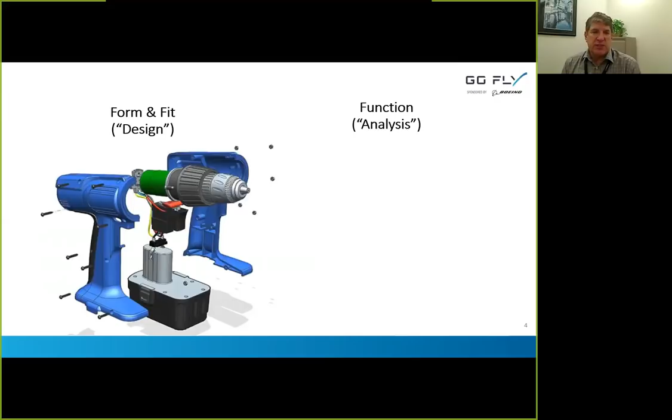So I cleave the world, as an oversimplification, as a conceptual designer, into form, fit, and function. Form and fit is design. And design is: what do the parts look like and how do they fit together? Clearances, overlap, interference, fit - it includes materials, it includes geometry and tolerances. And then function, which is: how does it perform? Does it do the job? And in the end, the question is, does it comply with the requirements?

Every engineering challenge is this balance: to define, to assess, and then if not compliant for whatever reason, to iterate. I tend to consider myself more in the design world, but the configuration job is primarily form and fit. Fundamentally, you're not done until the analysis has been done, and it's a balance of understanding all the requirements and the means to assess the design against each of those requirements in order to decide whether you're done.

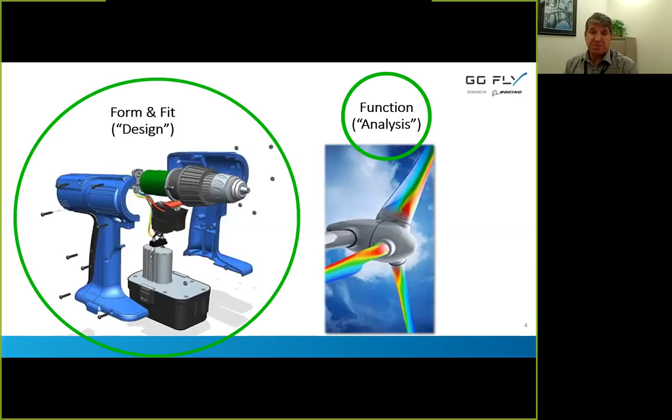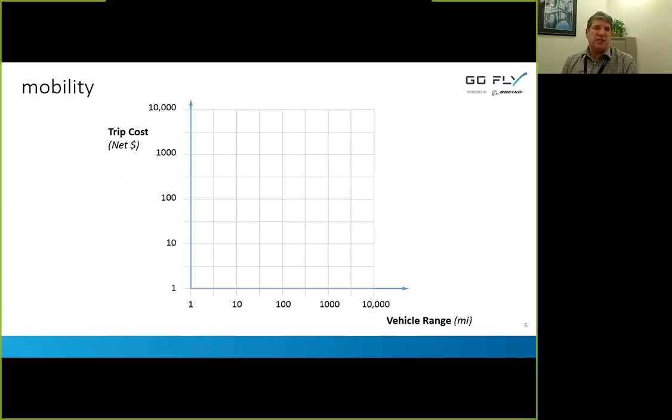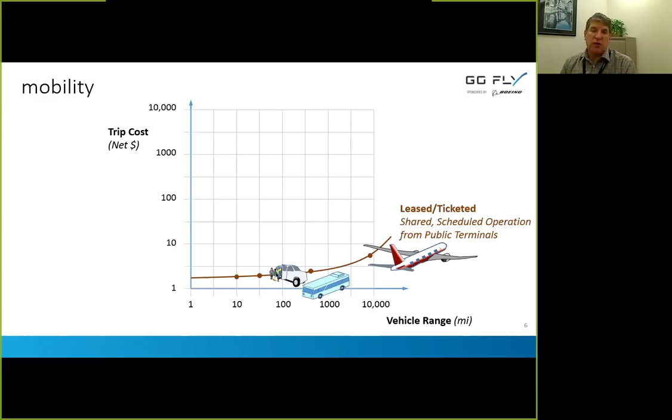So just a quick cartoon. What are we trying to achieve here? Knowing you're done means you need to know the question: what does success mean? So just a cartoon to illustrate, these are different means of cost versus distance of transportation - the van pool, a bus, a commercial airplane - and the cost grows with distance, but when you share that cost with others, it's lower. Or you could do it on your own, have private transportation, and the costs are higher. A private jet is much more expensive than commercial travel.

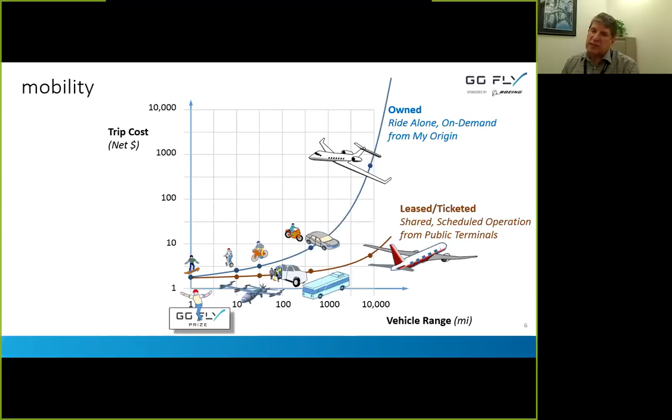Now, what are we trying to do here with GoFly? Uber Elevate is trying to look at joining together people and moving them around in an efficient way over short ranges, a lot of electric aircraft. But GoFly is in here at the low end. We're concerned about speed and we're concerned about range, but fundamentally, it's about the experience - it's about flying, not being flown, not as much about transportation as it is about the experience.

And so here's just my little cartoon - this is what we're trying to achieve. We're trying to, some say, wear this system as opposed to ride in this system. So we want to keep the vision in mind, because the vision is what impacts decisions, especially when those decisions could go either way. The vision of what you're trying to achieve will help you make those decisions. And this is my cartoon of what you're trying to do, the rules, and a cartoon of the fly-off. Keep in mind the objective - every decision gets you closer to that objective, and every decision is influenced by how best to get there on time and on schedule and perform as required.

Just a brief tangent on what is meant by the dominant configuration. In the beginning, there was the penny farthing, or the bone shaker, called a velocipede. Over time, they moved toward what's called the safety bicycle, but we just call it the bicycle. It's the dominant configuration, but it's not the only one. There are exceptions - we still, in some ways, refer to them as bicycles, but they're not exactly the two-wheel dominant configuration. And the same is true in aircraft.

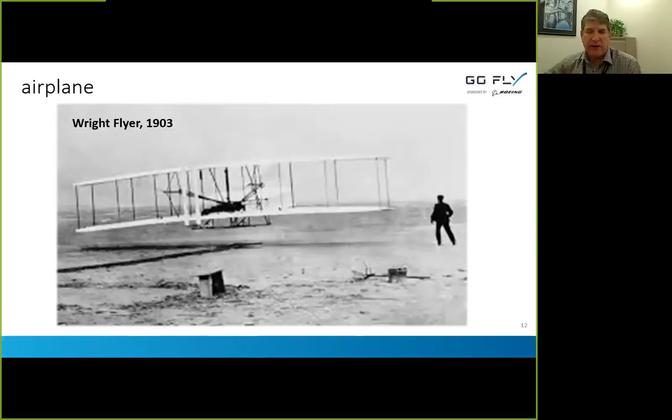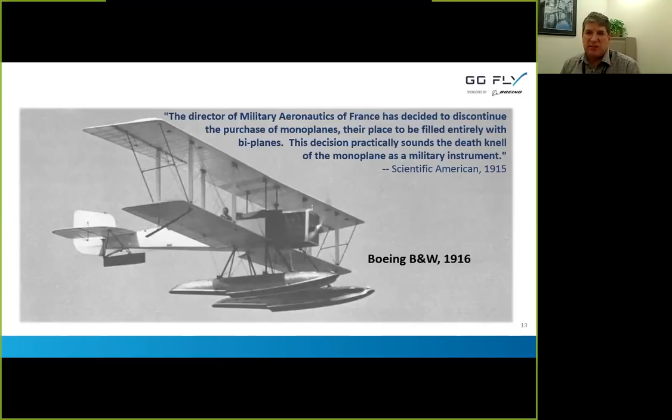We started out with the first successful manned-powered aircraft in 1903, and then we moved on. Boeing, Boeing and Westervelt in 1916, the beginning of our company, with a biplane. What's really interesting is a statement in Scientific American at the time, where they were so sure that was the best you could get to, the dominant configuration. There was a statement that they would entirely fill the sky with biplanes and move away from monoplanes, which of course we know isn't true.

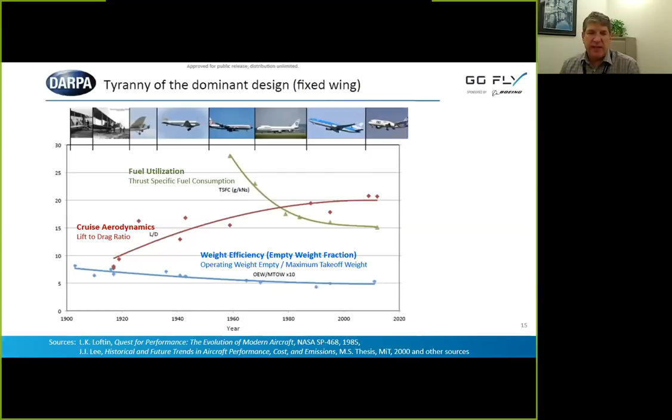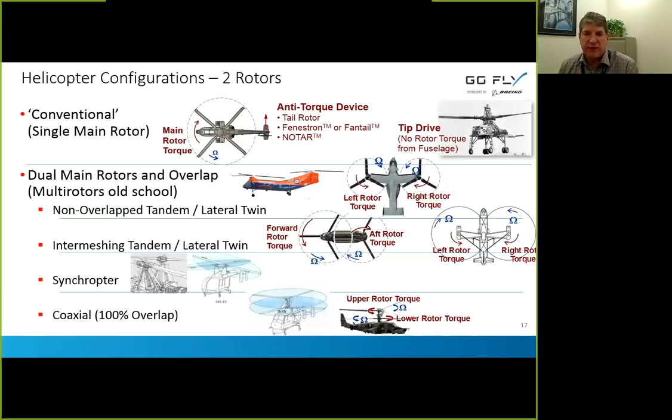Now we go to vertical flight. Early on, the lateral twin aircraft - you'll notice this is aircraft versus airplane, because we're not talking about conventional takeoff and landing. It's a little bit of a busy chart, but over time, helicopter configurations - again the dominant configuration is two rotors, single rotor with a tail rotor, the tandem, the lateral twin, the tilt rotor. Only on the upper right do we have a single rotor helicopter that truly only has one rotor, and that's because there was no need for anti-torque with tip drive. But again, there's a whole series of configurations here in terms of vertical lift aircraft, all with different strengths and weaknesses.

In the end, when people say helicopter, this is what they think of. It's the dominant configuration, and as I said, there are exceptions. They also qualify as helicopters, but they're not what people think of. So that's the meaning of the term dominant configuration.

Again, the metrics tend to level off until you make a dramatic change to the configuration. You get what you get. You need to really come up with a technology breakthrough, perhaps at the subsystem level, if you're really going to see improvements.

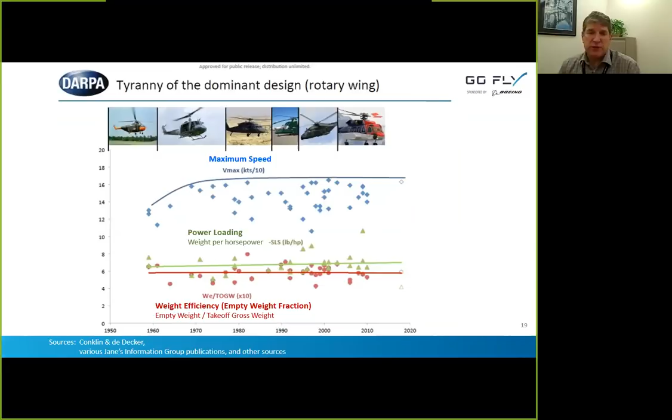We have this small, quiet, urban transportation activity going on, sponsored primarily originally by NASA and Mark Moore, and now Mark Moore at Uber, and the Uber Elevate activity, with an extraordinary number of companies. I haven't shown any pictures here, but there's easily 65 designs currently in the news, and new ones every day, with organizations popping up.

So again, there's a new mission, but to remind you the difference: what they're trying to do with urban air transportation, urban air taxis, on-demand mobility, is get people from A to B — it's more about riders than about the experience of flying. So when you make decisions, keep in mind the difference between what we're trying to achieve with GoFly, what we're seeking you to achieve with GoFly.

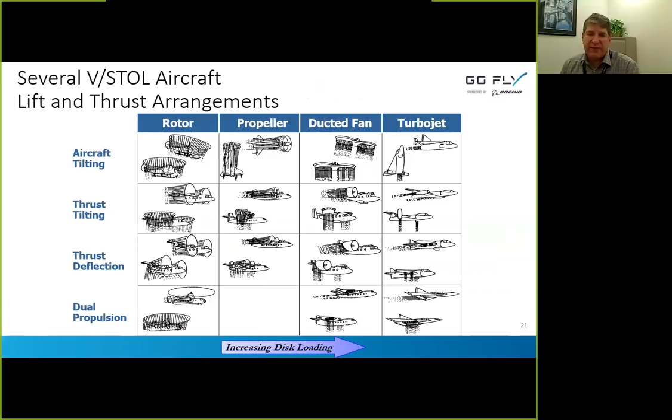An old ancient cartoon, just to illustrate when you start to talk about more than just vertical lift, but going some distance, especially with some speed — there's a whole series of ways to skin this cat: tilting the aircraft, tilting the thrusting system, deflecting the thrust, or having dual propulsion. Many of these have been tried, and there's not a whole lot new under the sun when you think about it.

If you look at the left side, this was in 1959 — look at that, 6 propellers on a wing with tilting. Looks a lot like some of the electric on-demand mobility designs that are coming out. And at the top, Curtiss Wright, very successful with a tilting quad prop, and then some more designs, and there's a tilt wing on the right with 4 props in line.

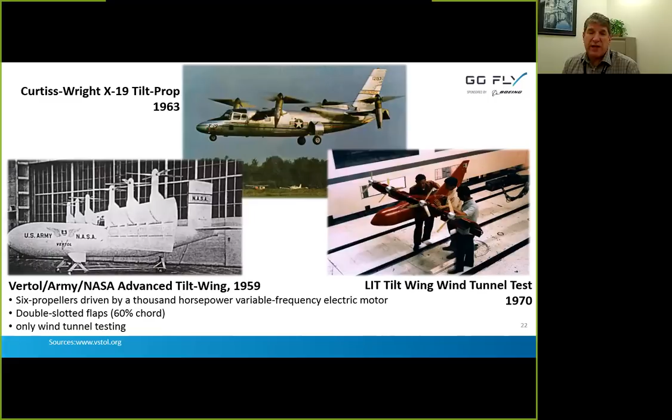Many things tried, many things, they were tried military, a little bit of civilian work going on, but they're challenging because they run into the challenges of meeting all of the requirements.

Many of you may be familiar with this, the original version of the V/STOL Wheel by McDonnell Douglas Aircraft Corporation. It tried to illustrate the many different ways of achieving what's called V/STOL flight, vertical and short takeoff and landing. Now this included concepts that never flew — this was theory and cartoons, and it's been iterated many times.

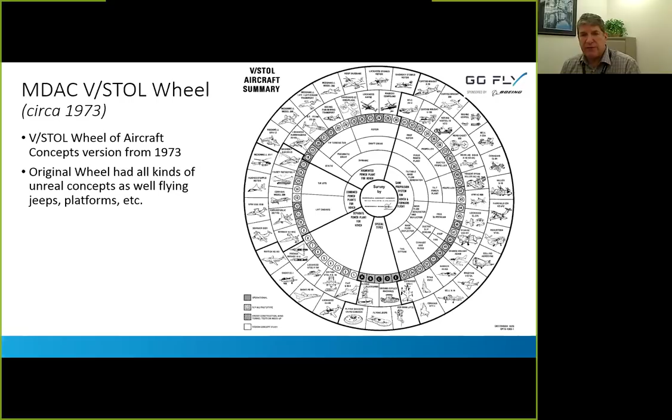I have a collection of the iterations of it, and this is the latest — Mike Hirschberg of the AHS has been the fundamental archivist who has done the latest version. And it illustrates the V/STOL concepts.

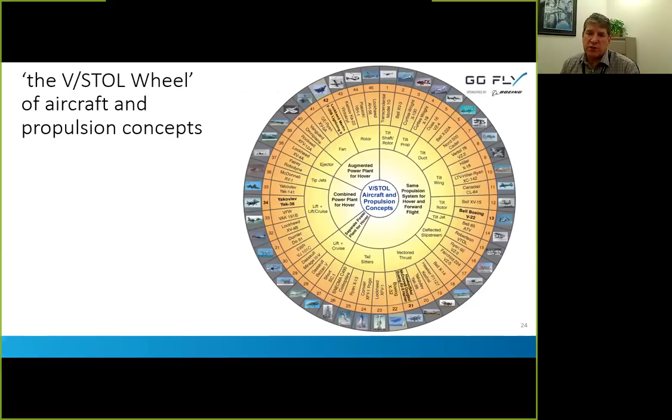Almost every single one of these have flown. Unfortunately, it's called the V/STOL Wheel of Misfortune, because very few of them have actually gotten to fielding. But I don't think it's misfortune. Many and most aircraft crash in flight test and have incidents and mishaps — that's part of the game. And good judgment comes from experience, and experience comes from bad judgment. So it pains me a little bit when this is called the V/STOL Wheel of Misfortune, because it really is a great testament to the amount of engineering that was done to solve some very, very hard problems.

Many of these flew, but they didn't have enough payload or useful load to become a valuable product, but they still flew and illustrated. Now, only 4 of these aircraft, different types, have gotten to any kind of military fielding, and there's one on its way to civil fielding, and that's the Leonardo AW609. Although they just pushed certification back, it's still well on its way to providing civil capability.

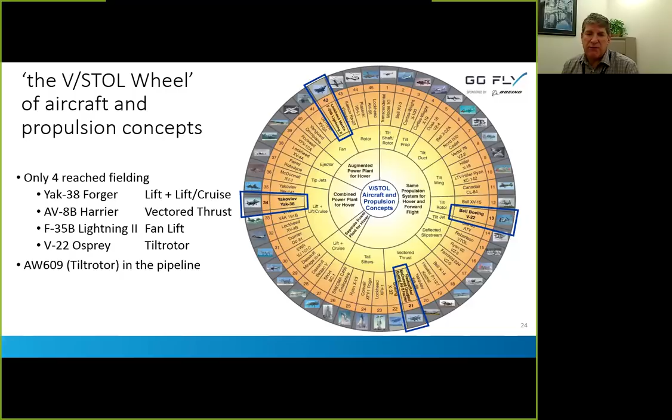So it's an interesting history of many different configurations, and I invite people to take a look at the V/STOL wheel, just to look into all the different ways that people have tried to solve this problem. But what you should understand is that perhaps the most significant, the second is probably useful load capability, because of the costs associated with this challenge.

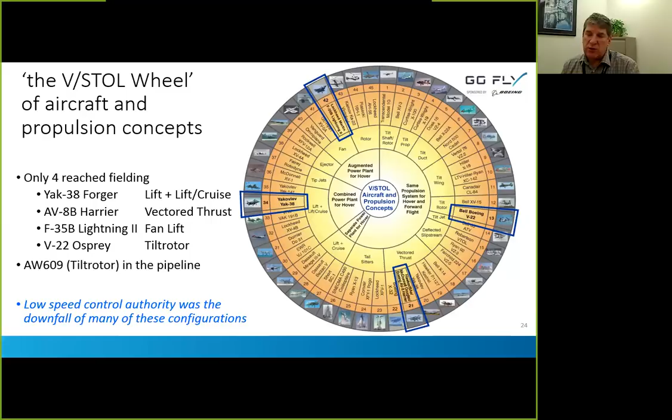The most significant reason these aircraft didn't succeed is that they may have flown well as an airplane in cruise, and they may have hovered well at low speed, but they didn't have the low speed control, and they did not have the control authority in transition from hover and VTOL to cruise and back again. That's actually the hardest part. Making it fly like an airplane and making it hover like a vertical flight aircraft are far easier than getting through transition and conversion. So keep that in mind, and we'll talk more about control authority and balance of the airplane.

Just a quick example of why I really love being a configurator. This is the Comanche. I was fortunate in the early 80s to be on the configuration team.

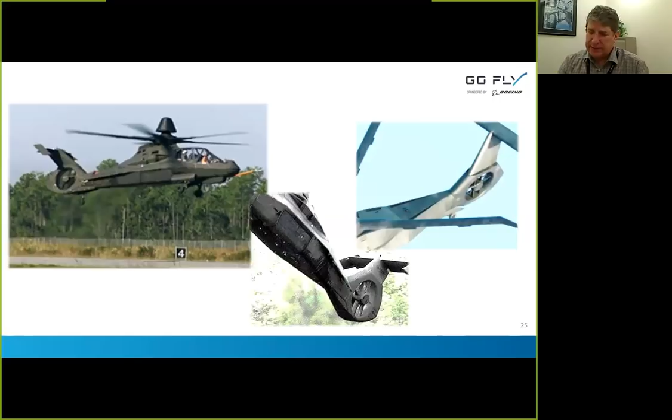We were working on how to get the exhaust not to provide an infrared signature that would allow it to be threatened by shoulder-fired infrared missiles. I'm at the knee of a great configurator, Bill Harper, and he says, 'Hey, how about if we exhaust it in a long, thin strip along the tail boom, and it'll mix really well, and we won't have a plume.' Bob Frawley from Sikorsky, the propulsion lead, says, 'Can we do that?' And Bill's comment was, 'Yeah, I can do anything I want. That's why I love this job.' I remember that like it was yesterday.

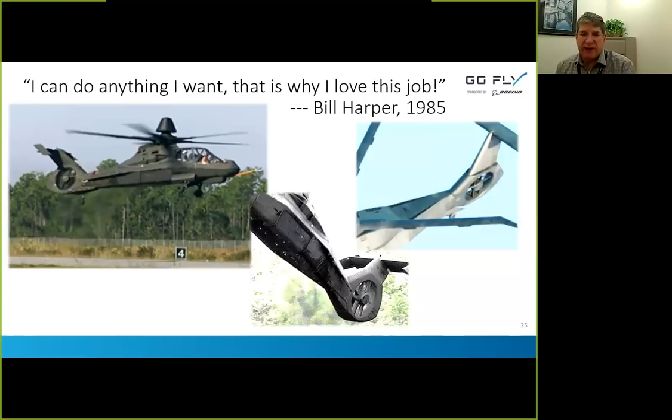The challenge is, it's not just about what you want to do. It's about finding a technically feasible solution that meets the objective. So it's not just cartooning. It is, in fact, innovating and trying to find a way to meet challenging requirements in a new way.

So what are the constraints here? Of course, there's physics. There's perspectives and paradigms that's never been done before. And then there's resources - the funds, the material availability, the tools you have to get the job done, the team of people, and usually most important is time. Because if we had the luxury of time, we could redo it and we could iterate. So time is one of our greatest pressures.

Just a little cartoon - we've got resources, we've got the paradigm. Sometimes we can afford things that other people don't get and they're uncomfortable with. And then there's physics, and there's our design. The conventional design is inside the paradigm and inside the resources and inside the physics. And then we have the unaffordable, and then we have the impossible. Our challenge is to move from the conventional, the dominant configuration, and be creative, but work within our constraints to try and achieve something novel that perhaps people aren't comfortable with, because the paradigms are a challenge, especially among your sponsors and the regulators and all those people who do in fact have to buy in. But that's the challenge of selling your story and making the case for the fact that it can be done and that it better solves the problem in the face of the risks.

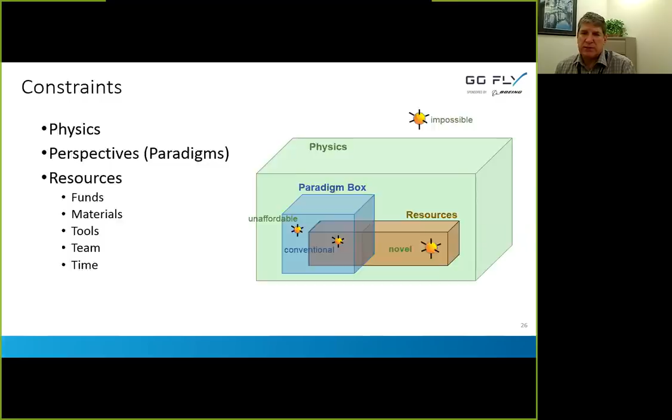So a cartoon here, we've got a lot of ideas, and our challenge here is to think critically to try and understand which ones we're going to spend our time on, and more importantly, how much time we're willing to spend on an innovative idea, either to make it work or to recognize that it's not going to get there and we have to move somewhere else. That's perhaps the biggest challenge - something you're really excited about, but it's not getting there. That's why conversations with others and communicating in teams and diverse teams are so valuable, because we as individuals get really excited about our ideas, and we have to think very critically.

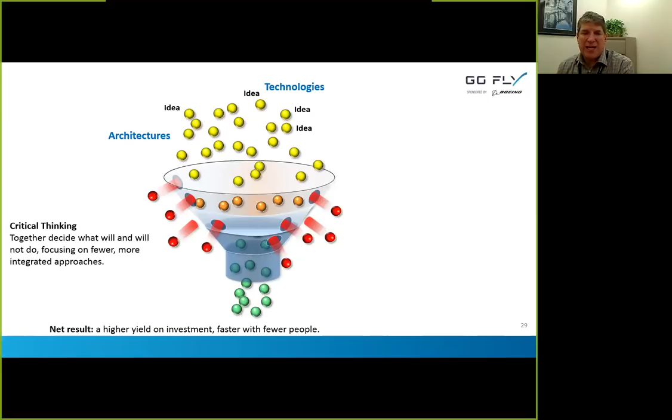And the goal is to filter out the ideas that are just not getting there and end up with a very narrow set. So as you're designing, you may have a whole bunch of creative things, but if you don't have the time to make sure they work, or they don't actually add value based on the amount of costs, how much work they are, you may have to abandon some of your good ideas. And that's the most strategic part of configuration design - deciding what not to work on, what not to change, what is good enough. I'll come back to that.

So here it is. Here's the picture of the aircraft. Everybody loves the picture of the aircraft. I've been on programs where we don't really know what the requirements are, and everybody is screaming for a picture of what the aircraft looks like. And the challenge is, as soon as you do that, you lock yourself in terms of some paradigms. So the later you can put down the solution, the better. As a matter of fact, Gwen has been very clear in this GoFly activity that we shall not have an icon of an aircraft.

We shall not be showing anything that implies an approach to a solution, because that immediately narrows the design space. We really want the real resources, not the paradigms, but the tools and the team and the funds and the schedule and the physics to limit us.

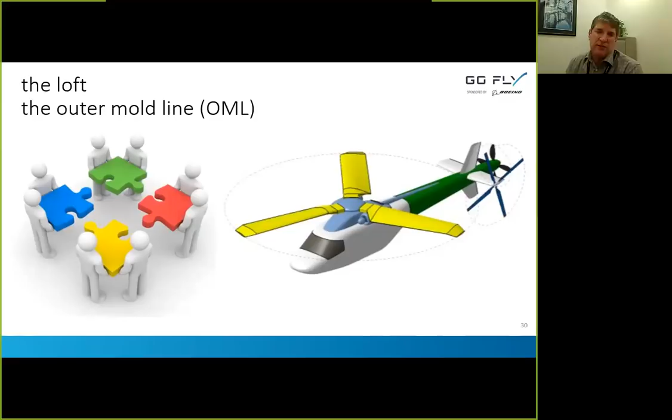And we don't want to be stuck with paradigms. Now, oh, it's easy, let's just put some parts together. That's great. Look, I've got these four parts. I got my rotor, I got anti-torque, I got a little bit of structure. Not so simple. First of all, those parts are only a very small subset of that OML, of that loft line.

There's a whole bunch of other things you have to worry about, not only the rotor and the propulsion, the thrusters, but all these other pieces. Some of them have to worry about it, some of them don't. I don't think we have a requirement for communications, but it's not a bad idea to have communications. It's a whole bunch of other pieces.

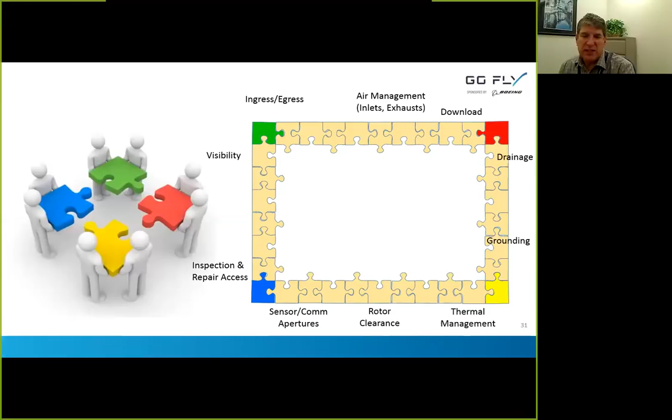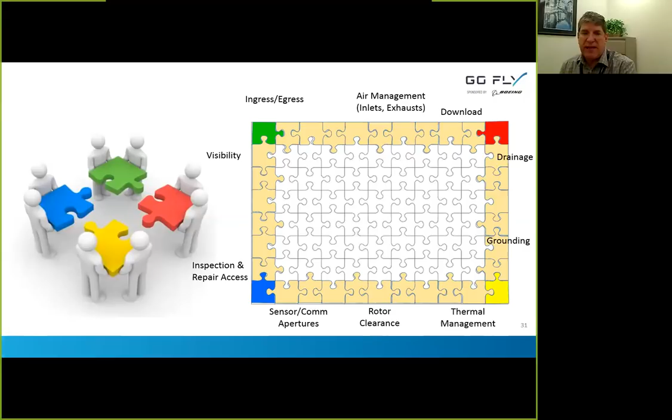But even when you have that OML, the OML is not actually where you start. The OML has to fit everything on the inside, and that's the real challenge. It's invisible. People want to see the aircraft design, but the real challenge is trying to get in and understand all the piece parts and making sure it fits. So we've got this stuff on the inside, and that's actually the more interesting and the harder part, because that's where we have to make sure it fits together and it works together.

We have to do both the form and the fit, and then we have to understand the functionality. Because in the end, if the functionality is not compliant with what it needs to do, it doesn't matter what the system looks like, it doesn't succeed. And if the functionality is far better than what's needed, you may be wasting some of those valuable resources. So that's the challenge, is to balance that every piece just meets its requirements, and you spend your time and effort ensuring that every piece is good.

So, is there enough space inside your aircraft for all the things you need to fit? Have you thought of all the things that need to fit? You never want to hear an 'oh shoot, I forgot,' an OSIF, because that means rework, and rework is your enemy in terms of time and resources. So you really want to go slowly enough to make sure that every step is done with enough confidence so that you can get there at the end and avoid rework. But that's a challenge, getting there quickly. But if we go too quickly, we have to do things over again.

So most important, do I have room for the payload? That's why I'm doing this, the aircraft itself is serving a function. Do I have the propulsion? Do I have the fuel, the stored energy? Unless I'm harvesting energy, I've got to carry it with me for the mission. I've got to have enough until I get either to the end of the mission or the point at which I can refuel. Structure, landing gear, pilotage, whether that's a person or that's the computing and the communication that allows you to do it remotely. And then I have, depending on the complexity, the utility and secondary systems, and more, but have I thought of all the pieces so it all fits?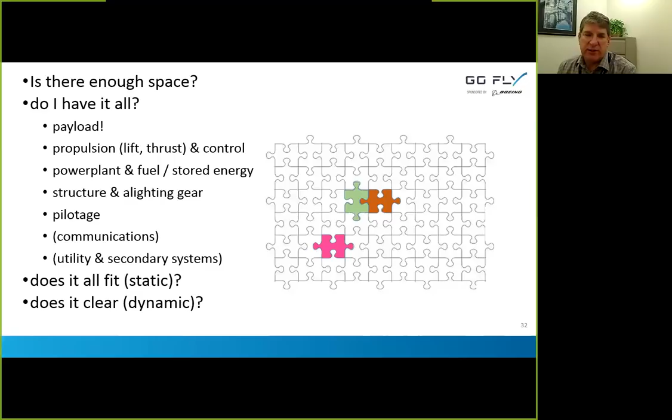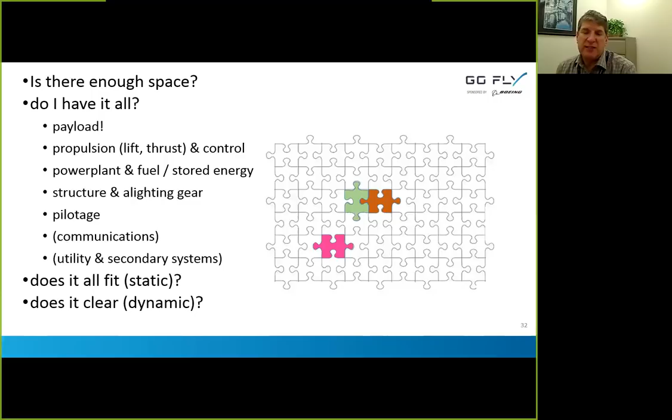Does it all fit inside the aircraft? And does it, in all conditions, landing gear doors open on the Comanche, rotor blades spin, do the things hit each other? They move the way I intend, and then they also flex. So do I have clearances so they don't have interference? Very, very quickly, you'll find things will not continue to move past each other if you have negative clearance.

So probably the most important descriptor of attributes at the front end is SWAP. It is industry worldwide standard: space, weight, and power. But unfortunately, it oversimplifies a little bit, because when I talk about resources, we also have to worry about space, weight, power, cooling, and cost.

Let me talk first about space. So space, this is back to the form and fit. We're using nowadays computer design tools. They're incredibly powerful. They're a little bit limiting in terms of creativity, but they're incredibly powerful in terms of making sure things fit, understanding their envelope, overlaps, and interferences.

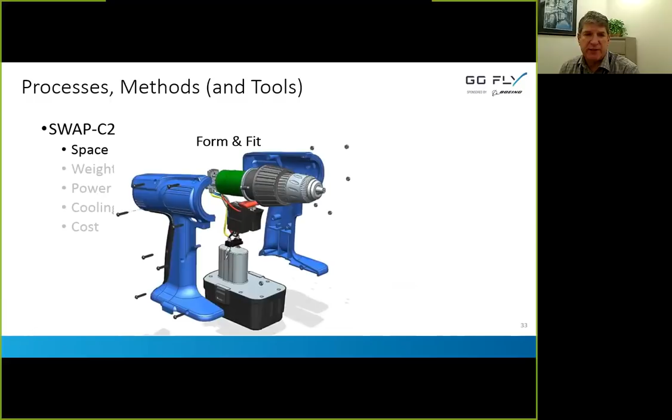Did it all fit? Now, that word balance is pretty critical. We're an aircraft. We're being lifted by something, either a fixed wing or rotary wing or a deflected thrust, and it needs to balance. It needs to be stable. So we have to do a very good job of managing where that center of gravity is. That's a huge piece of configuration design. You can't just stick things anywhere you want.

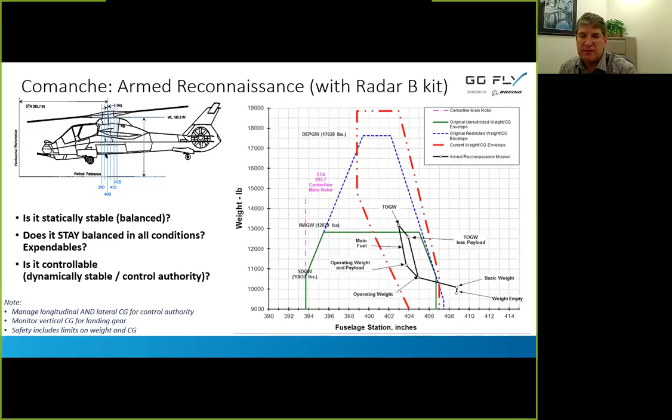And if you see the bottom bullet on the bottom left, safety includes limits on weight and CG. You can't just willy-nilly add something to the nose of the aircraft and be confident that it's going to work. Sometimes if you've been on a small turboprop airplane, they ask people to move from the front row to the back because they have to get that center of gravity in the right place before they take off so that throughout the flight, they have a safe envelope.

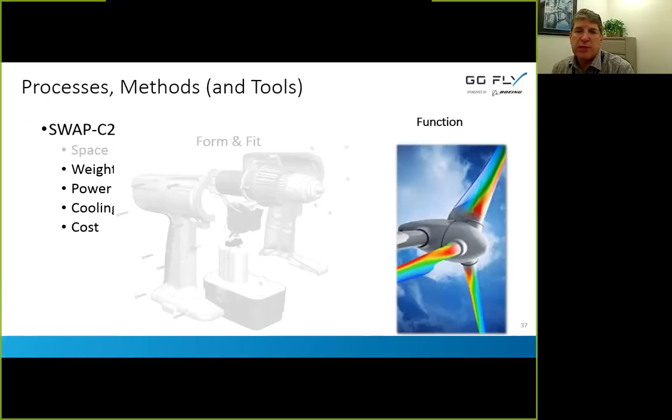Now, so we move from the space piece, which is form and fit, and now we move from form and fit over to function. This is where the analysis comes in. This is where I say, how does that design perform against loads, against aerodynamics, and does it comply? In other words, are we done yet? And the key is compliance. In the end, it comes down to the requirements, understanding your requirements, making sure you're not working to any assumed requirements that aren't real, which makes your job harder, and not forgetting any requirements, which makes rework.

We talk about requirements creep and requirements churn, and that's because we don't have the requirements well understood, and it causes rework. So that's among the most valuable things you could do up front, is to say what you are going to achieve and being very clear about the assumptions about what you're not going to achieve.

Now, we've got these amazing analysis tools available these days. It's really phenomenal how much computing we can do and how fast. And I'm confident many of you are looking at these tools and using these tools, but be very careful not to use the tool because you can. You should use the tool because you need to.

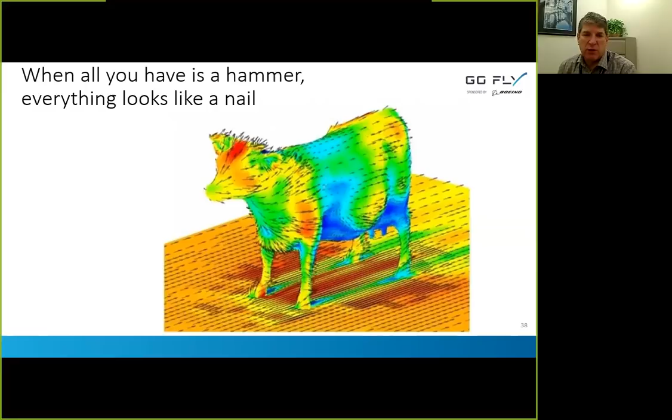So that's the paradigm at the top. When all you have is a hammer, everything looks like a nail. Please don't just use the tools for the sake of using the tools. Pretty pictures have no value. The goal here is to check compliance against the requirements. Here's an example of an aerodynamic analysis of a cow because it could be done.

Please don't use your time doing that, because it might be fun, but in terms of meeting your objective, it's not going to help you. Use the tools where they bring value. And on that note, precision is not accuracy.

You're looking for accuracy, a means to generating function assessments. You're assessing function, strength, aerodynamics, and so on, to the level necessary to make the next decision. Just because the computer told you there were 10 significant digits doesn't mean you have that much knowledge. You probably only know things to a few significant digits, and anything that gets you more than that may not be a use of your time.

I don't know if you've heard the expression, better is the enemy of good enough. But in fact, there's no such thing as better once you're good enough, because good enough means you're compliant. Once you're good enough, you need to stop. All that value, all those resources you're spending to make it better are robbing you of the ability to comply somewhere else. So better is not only the enemy of good enough, better can't exist once you have good enough.

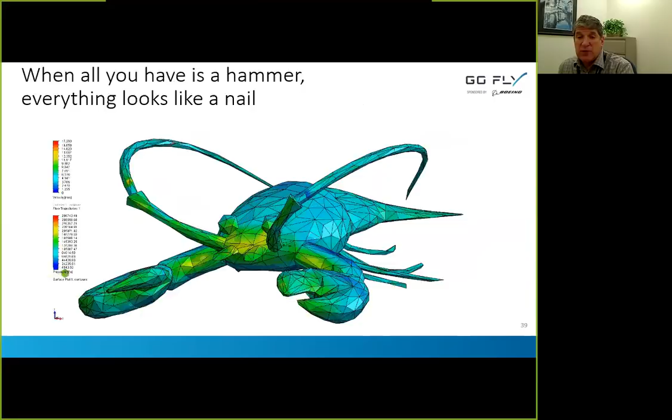You don't always need the CFD analysis of the lobster. Sometimes a measure of phenomenology is good enough, enough information to make the decision so you can move on to the next decision.

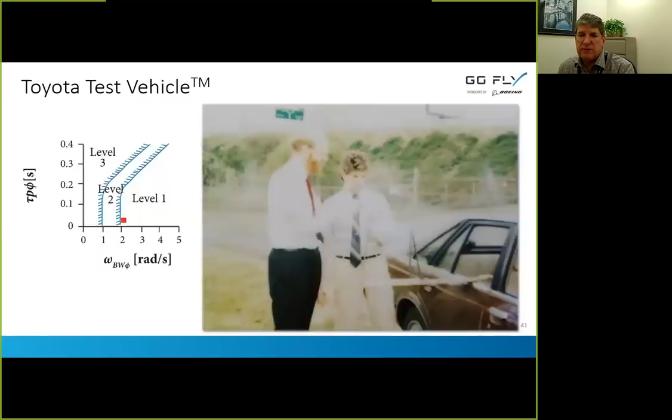You spend your time and your precision and your resources only getting an answer when it's significant and driving the decision. So again, the amount of time you spend on this functionality assessment is a slave to the decisions that need to be made to decide whether it's good enough or it has to change.

Another one of my great mentors, Dave Harding, said to me, the answer is not usually one of the trade study alternatives. So you do this trade study with a series of choices, and you find that each of them has a fatal flaw or a significant flaw, and the answer pops into your head. You don't need to go back and redo the trade. The trade was incredibly valuable in that it led you to the answer. It gave you all the learning, you understand the functionality analyses, you understand the trade space.

So sometimes the trade study itself is just a means to coming up with the design, the one that's compliant, the one that's perhaps most elegant. So the trade study is a tool, but don't be a slave to it. If you get partway through and the answer is obvious, move on.

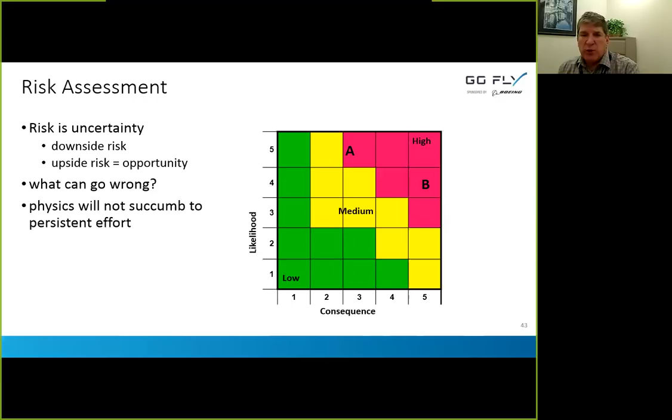So if we take this consequence, how do we deal with something that's high risk? Well, one way to do it from B to B prime is to do some analysis, to do some testing, to go out and do a test vehicle and see if the uncertainty can be diminished. Can I learn something that takes the uncertainty out? Analysis or test, or maybe designing it in a way where I have much more confidence about how it will perform. That's where very simple tests can reduce your uncertainty. So the likelihood goes down, doesn't change the consequence.

Alternatively, I can go from B to B double prime, and I can do something that reduces the consequence. One of those might be to design it to have an alternate, to have a backup, to have some insurance, spend some time on something that's not quite as good, but if my primary design is high risk and doesn't work, that I can have a backup. It takes time. It's insurance, because it's of no value if B works fine. But if B fails, I've got B prime in the back.

The other thing I can do is be conservative. I can reduce the consequence by being less optimistic and assuming less performance, simply adding margin, because margin is your friend. So if I get more conservative, the uncertainty is the same, but now my baseline is less optimistic, and some of that uncertainty becomes upside risk. So I turn uncertainty into opportunity by being less optimistic. So it's still uncertainty, but it's uncertainty that can help me.

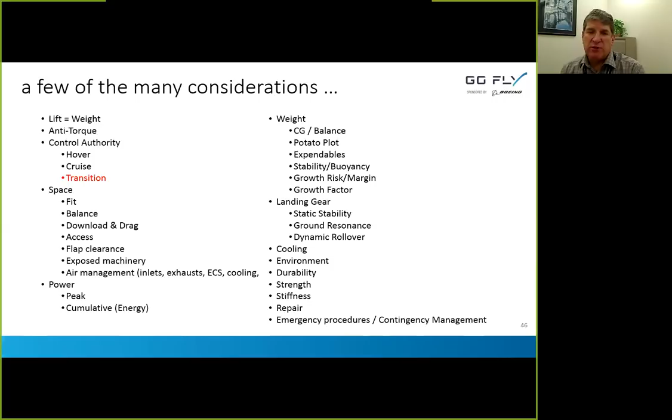This is the job: the chain's strength is dominated by the weakest link, and you're trying to address them all, understand the weakest link, and make it stronger. Again, don't spend too much time making any link perfect, because it's only as good as the weakest link in the chain, and the configurator needs to be looking at the entire system as a package and thinking very critically about the gaps, what's missing, what's been forgotten.

The stuff that people are working on is the easy part. The stuff that nobody knows is forgotten is the challenge.

And my last chart, I just want to return to the goal here. Keep in mind what you're trying to achieve. That answers every single question. Does this help us develop a system that can achieve this objective? Does it move us toward it or not? And if it's not moving us toward it, it's wasting those critical resources of time, budget, and team.

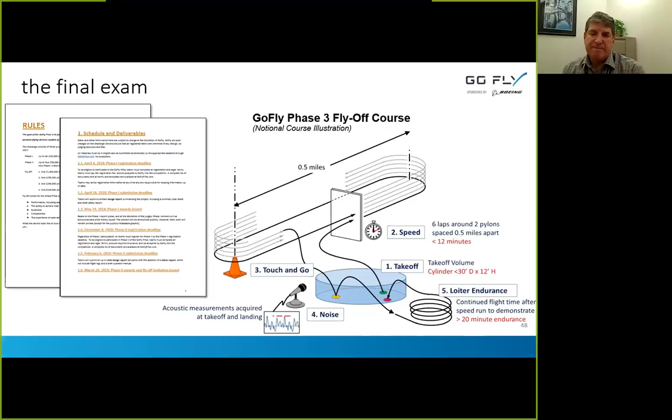I hope that was interesting. I hope it was clear, and I'm glad to answer any questions.

Great, thanks, Dan. A couple questions in already. First one being, how do you think drone technology can help the VTOL concept?

Okay, so drone is a buzzword everyone's become comfortable with. If we're talking unmanned systems, uninhabited systems, or systems that can operate without a pilot on board, the easiest of those is to simply take the pilot off board and have it remotely piloted. That reduces the threat to the flight crew, allows the aircraft to be much smaller, and dramatically changes the onboard requirements. So you've moved the pilotage off board, or alternatively, you do it with autonomy.

Those are all about controlling the aircraft and knowing how to keep the wings level, keep the blue side up and the brown side down. It's an opportunity, but fundamentally the physical system still has to have the control authority, the power, the energy, the durability to achieve the mission.

So drone technology per se is partly about getting the flight crew off the aircraft. If it's going to endure for 24 hours, it's better if it's uninhabited. If it's in harm's way, they call them dull, dirty, and dangerous. I don't know when and if we'll have fully autonomous aircraft with people on board until the regulators are comfortable with it.